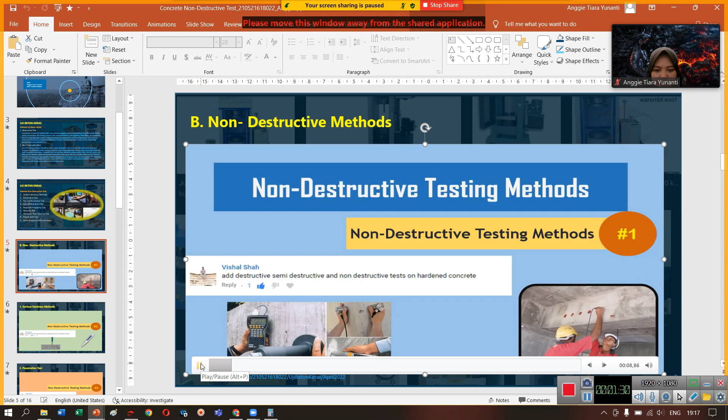Non-destructive testing, NDT, is defined as the method of inspecting, testing, or evaluating materials, components or assemblies without destroying the serviceability of the part or system.

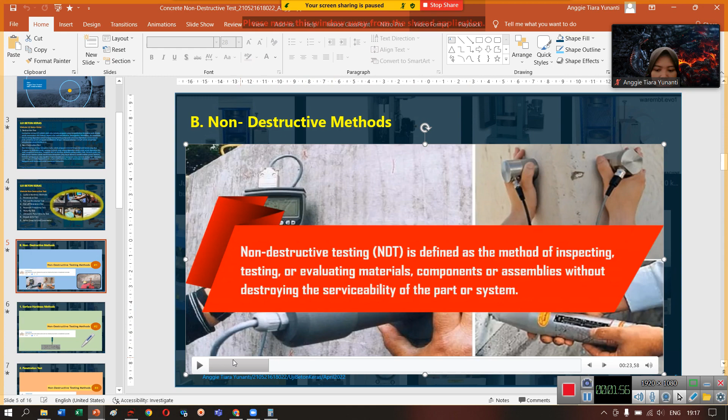Non-destructive testing is considered as a powerful method for evaluating existing concrete structures in terms of their strength and durability, and also helps in assessing and controlling of quality of hardened concrete.

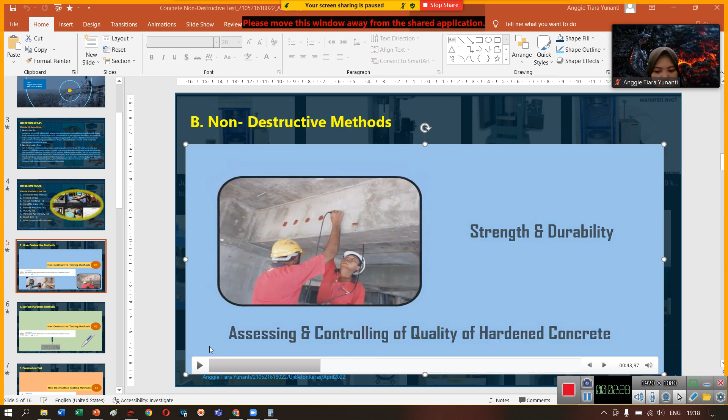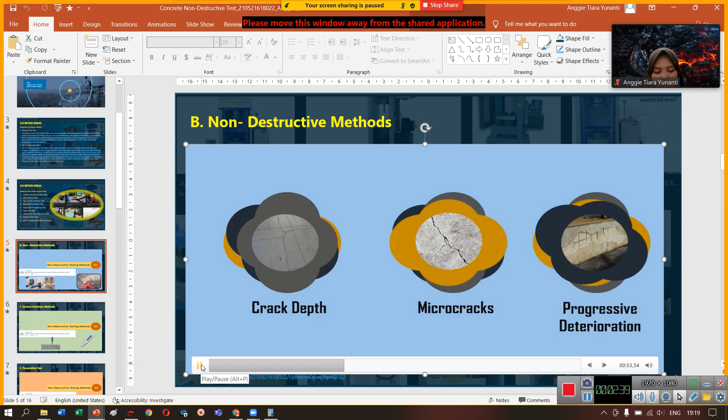Helps in investigating about the crack depth, micro cracks, and progressive deterioration. NDT methods do not affect the future usefulness of a structure.

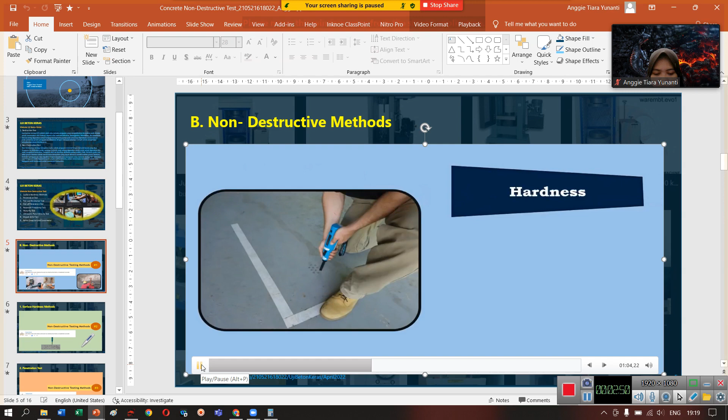These methods are used to measure properties of concrete such as hardness, resistance to penetration of projectiles, resonant frequency, and ability to allow ultrasonic pulse velocity to propagate through it. With the help of these data, the strength, durability, and other required properties of concrete are calculated.

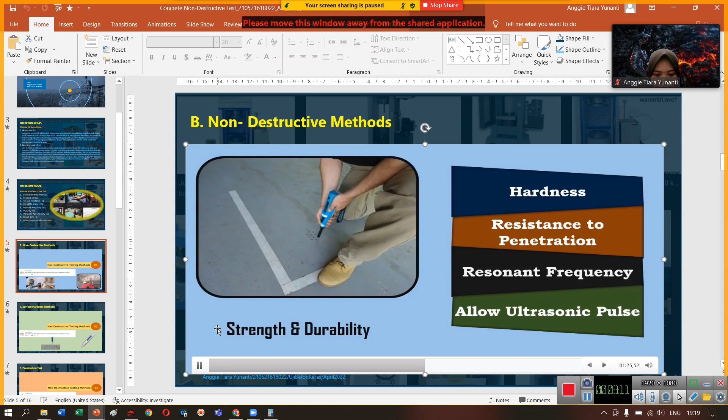There is a wide range of NDT methods which are used by the civil and structural engineering industry. The most common methods of non-destructive testing of concrete are:

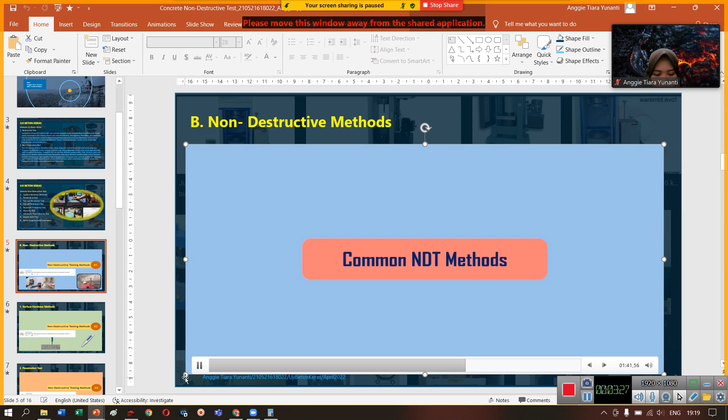Surface hardness methods, penetration resistance method, pull-out resistance methods, pull-off resistance method, resonant frequency test method, maturity test method, permeation test method, ultrasonic pulse velocity method.

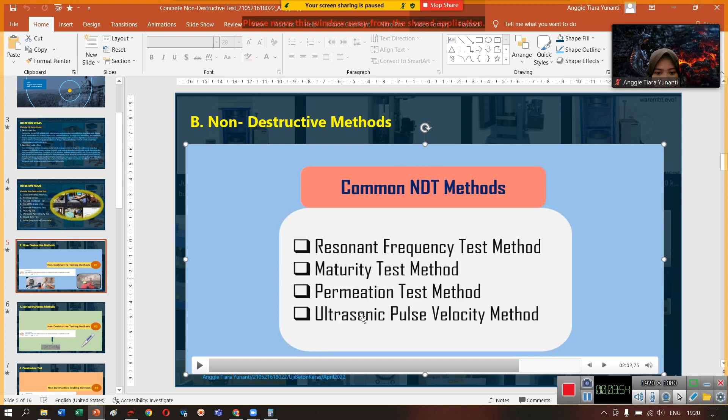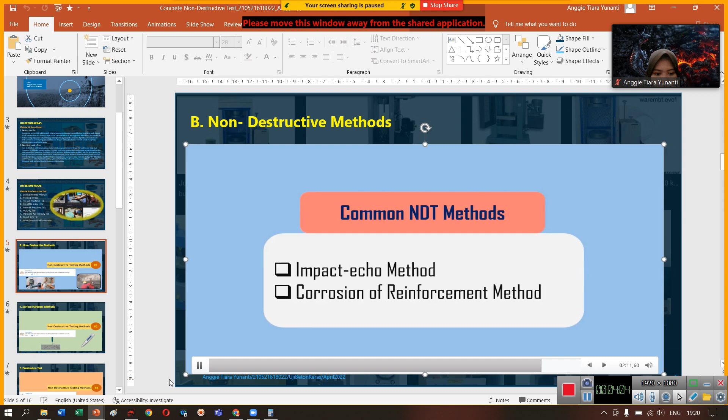Impact echo method, corrosion of reinforcement method. Let us discuss one by one in the future videos. Thank you for watching. Stay tuned.

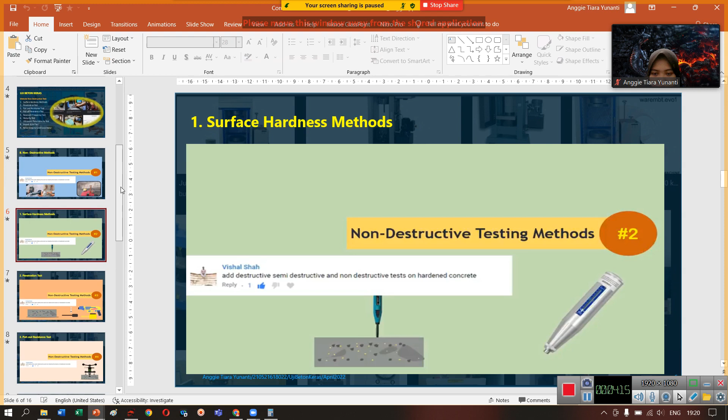Non-destructive surface hardness methods are non-invasive procedures that investigate strength characteristics of the concrete structure.

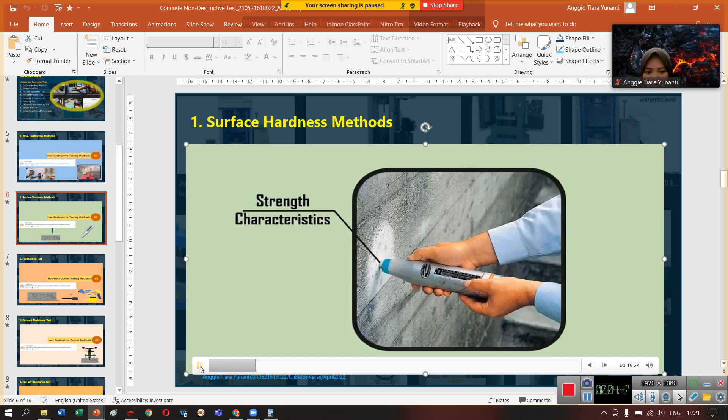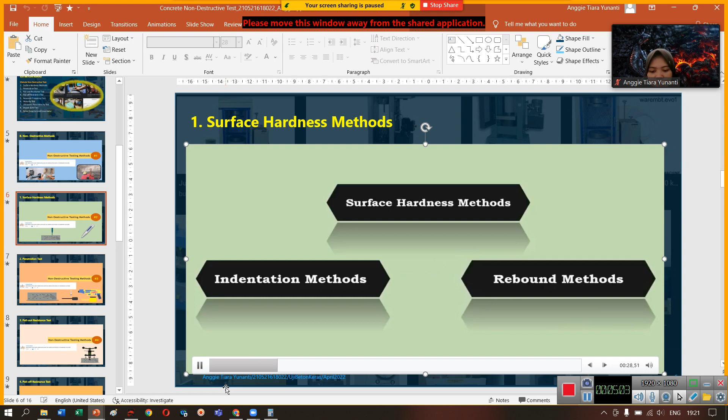This is generally done in any of two methods such as indentation methods and rebound methods. The rebound method is frequently applied to investigate concrete strength characteristics of concrete.

This test was developed in the year 1948 by Swiss engineer Ernst Schmidt, and thus it is commonly referred as the Schmidt rebound hammer.

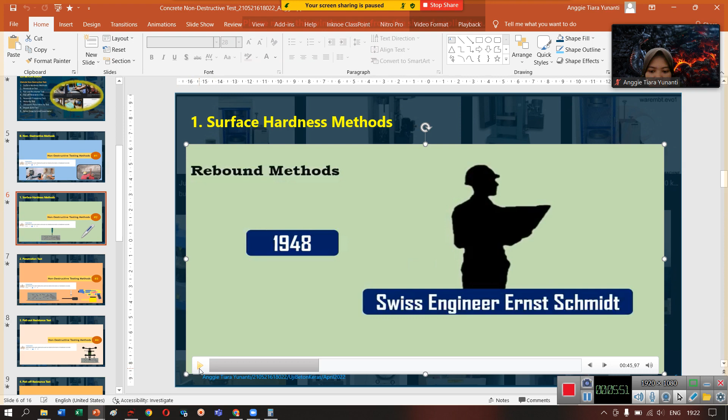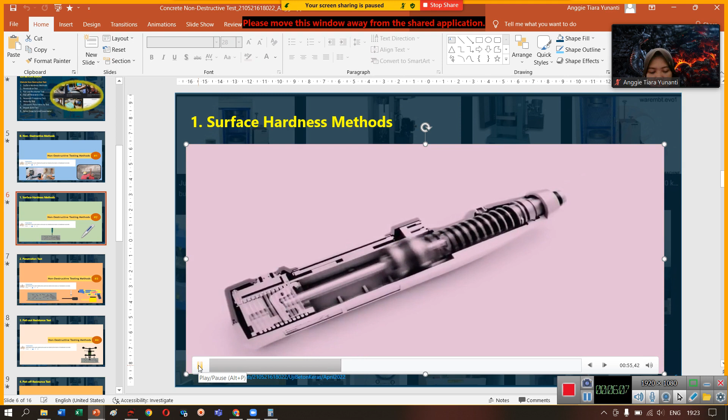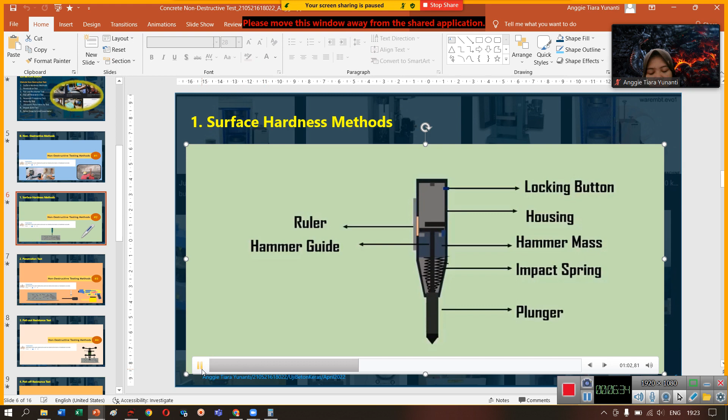When the plunger is pressed against the surface of the concrete, the mass rebound from the plunger. It retracts against the force of the spring.

The hammer impacts against the concrete and the spring control mass rebounds, taking the rider with it along the guide scale.

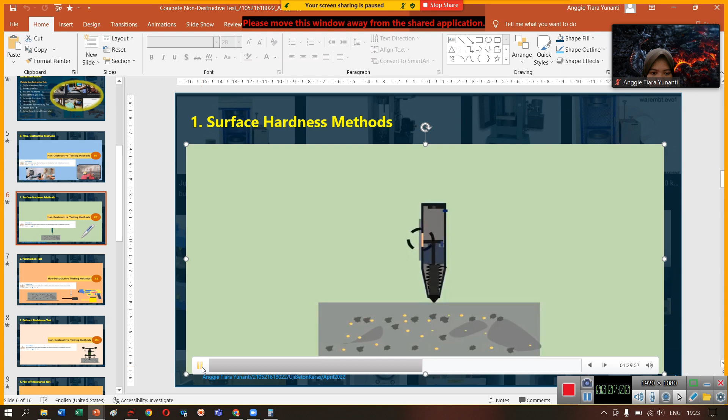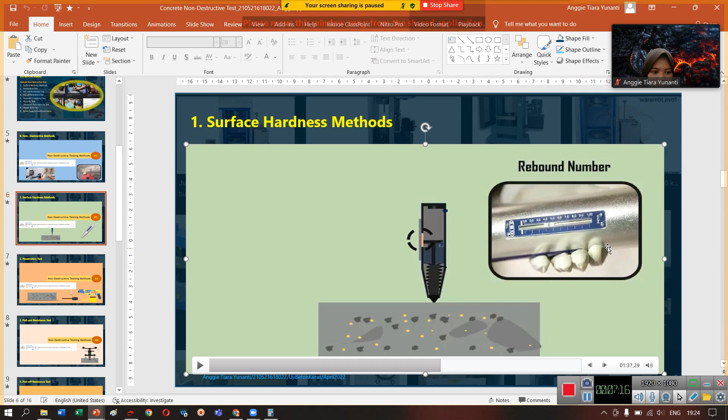The rider indicates the distance traveled by the mass, which is called the rebound number. The result can be seen on the device.

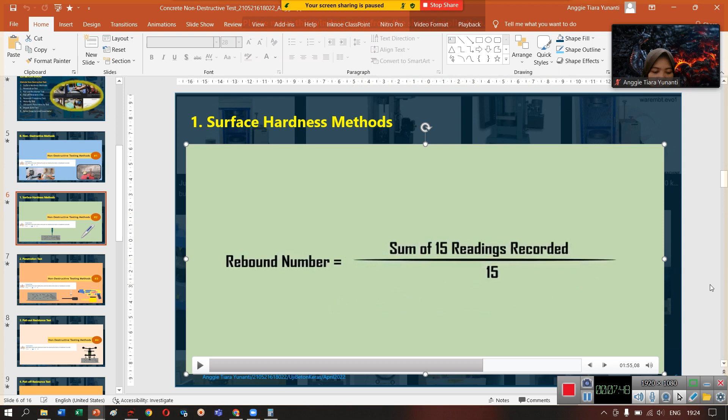The value of rebound number is taken an average of 15 readings. The rebound number value is obtained from the total of 15 readings, then divided by 15.

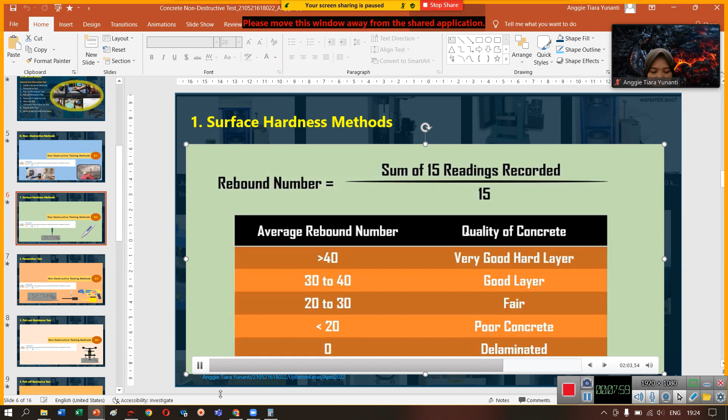There are many types of rebound hammer which vary considerably in performance, types, and needs calibration for use on different types of concrete.

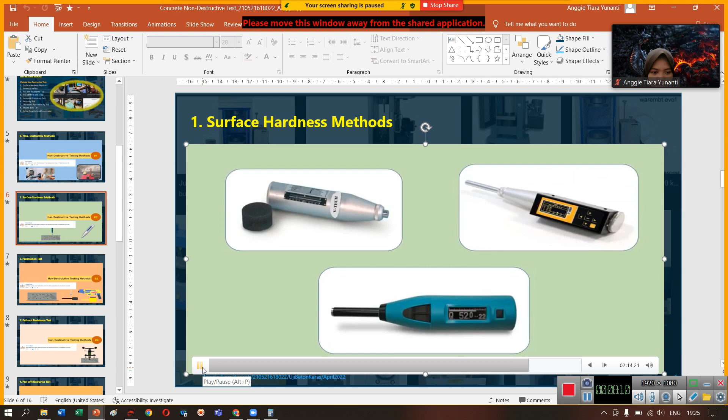This test can be conducted horizontally, vertically or at an inclined angle. Thank you for watching. Stay tuned.

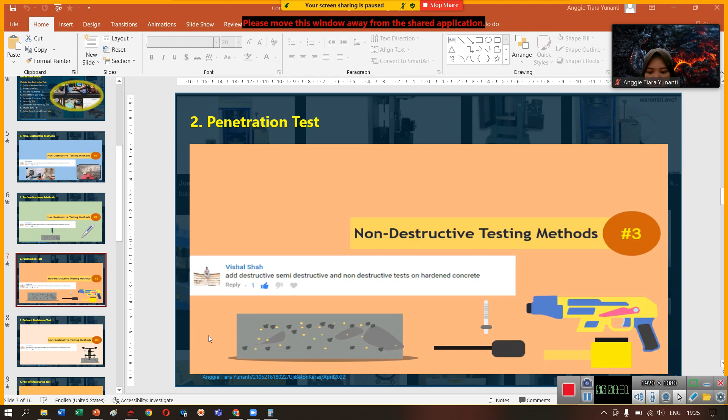Untuk yang selanjutnya adalah penjelasan mengenai penetration test. Penetration tests on concrete.

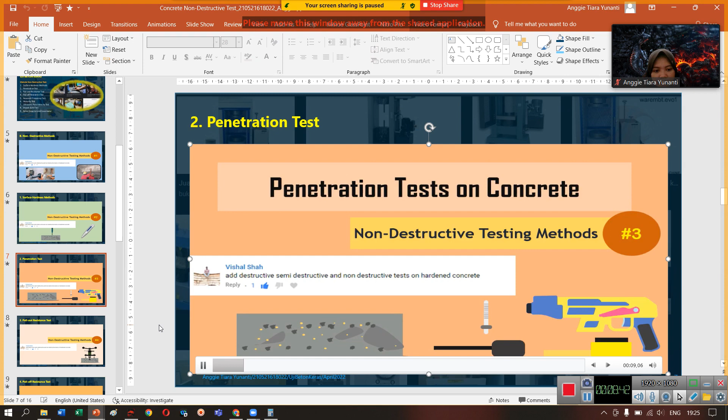Penetration resistance methods are aggressive NDT procedures that are used to determine the strength properties of concrete. Sama dengan tes surface hardness method, tes penetration test ini digunakan untuk mengetahui kekuatan dari beton.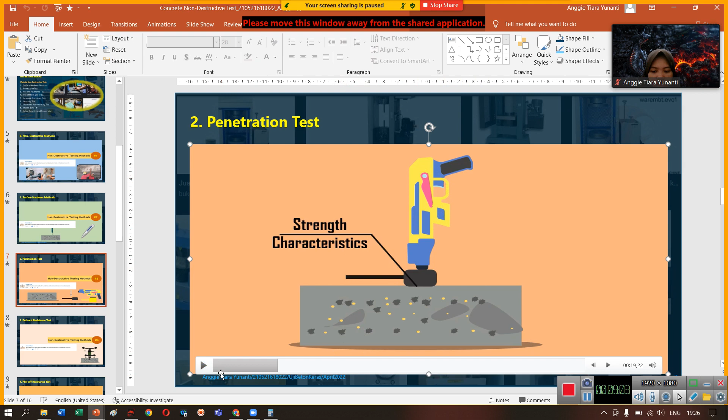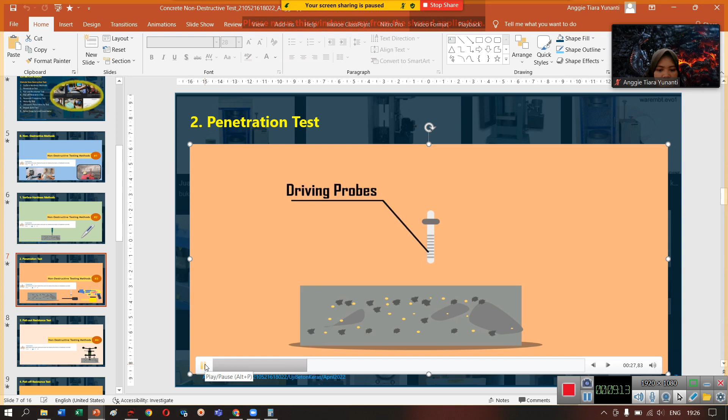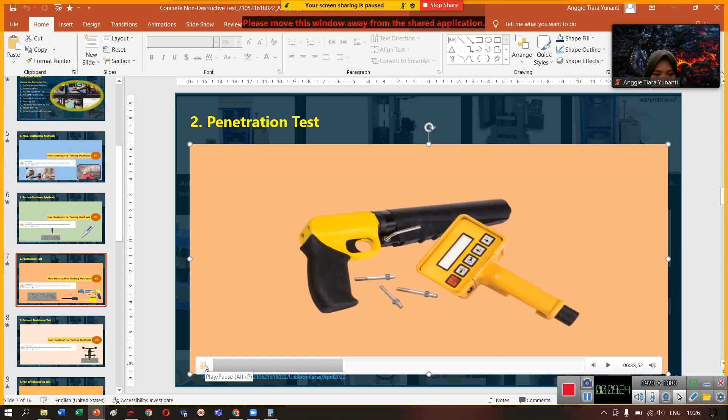This method is done by driving probes into concrete samples using a uniform force. The most commonly used penetration resistance method is the Windsor probe system. The system consists of a powder-actuated gun, which is used to drive hardened alloy steel probes into concrete structures and a measuring unit.

Jadi pengujian penetration test ini dilakukan dengan alat pada gambar, yaitu ada powder actuated gun, kemudian ada steel probes dan measuring unit. A probe of diameter 6.5 mm and length 8 cm is used for testing.

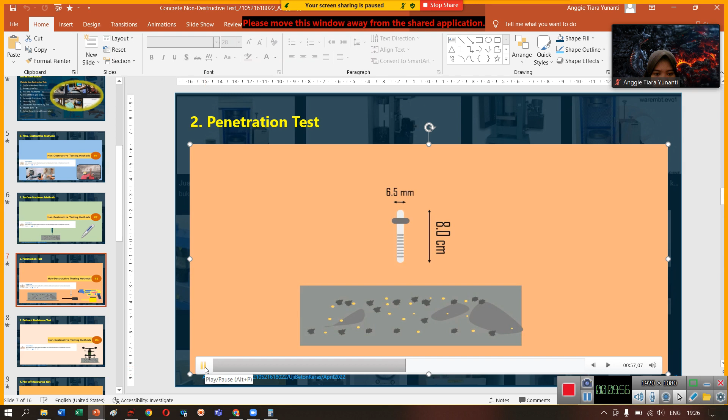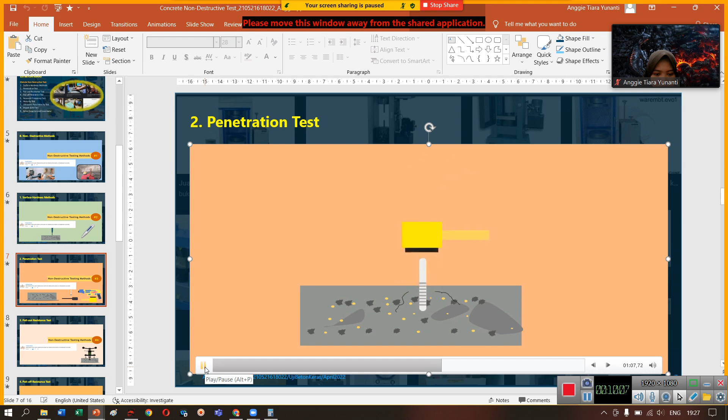The gun is placed on the required location and probe is forced onto the concrete sample. The depth of penetration of the probe provides the indication of the compressive strength of the concrete. The depth of penetration is generally correlated with the compressive strength of concrete.

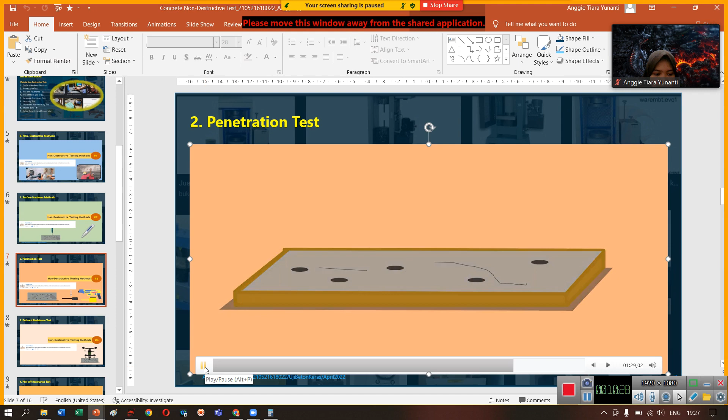The main disadvantage of this method is it makes a hole and damages the structure, and the accuracy of the result is quite low compared to other testing methods.

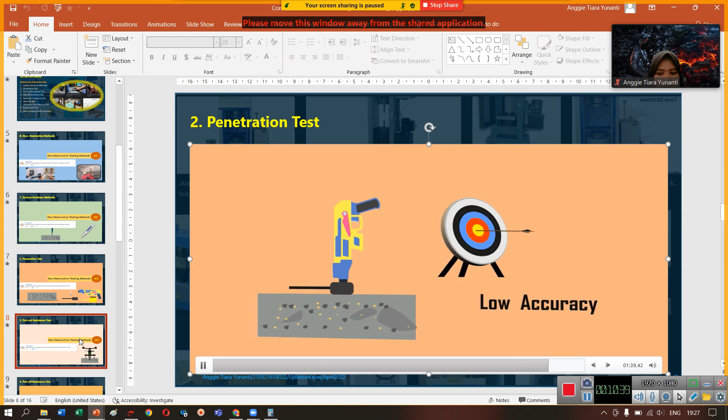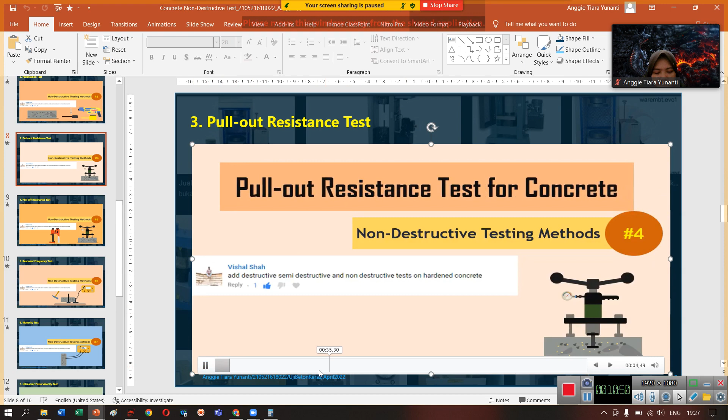Kemudian yang selanjutnya adalah pull-out resistance test. Pull-out resistance test for concrete. A pull-out test measures the force required to pull out the shaped rod whose enlarged end has been cast into that concrete from the concrete.

The stronger the concrete, the more is the force required to pull out. Using established correlations, the force provides the concrete strength properties.

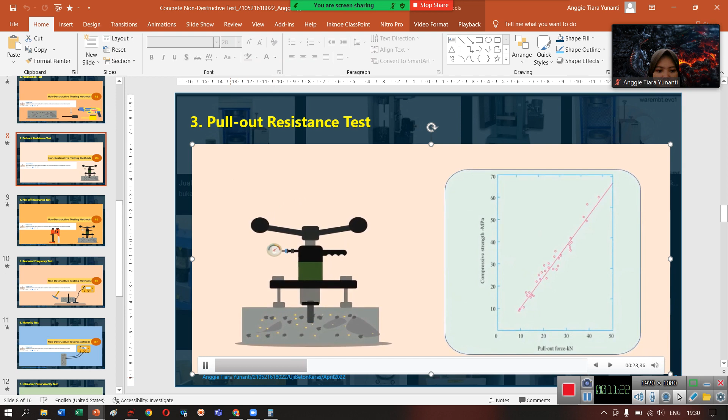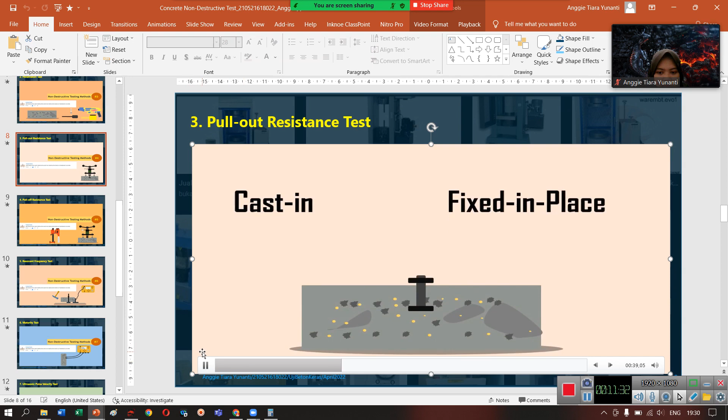The rod inserts are done by two methods, namely cast in and fixed in place. In the cast in method, the inserts are placed within the fresh concrete. In the fixed in place, the inserts are positioned into a drilled hole with hardened concrete.

The instrument setup to pull the insert is shown on the screen. The instrument is placed over the inserts and force is applied to pull the inserts. The pull-out force is resisted by normal stresses and shear stresses acting on the insert surface.

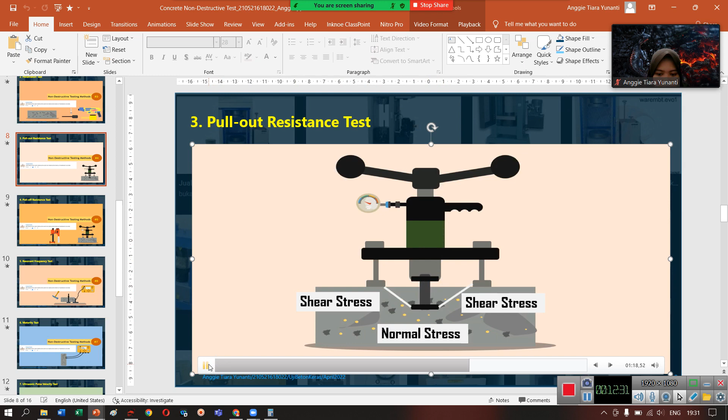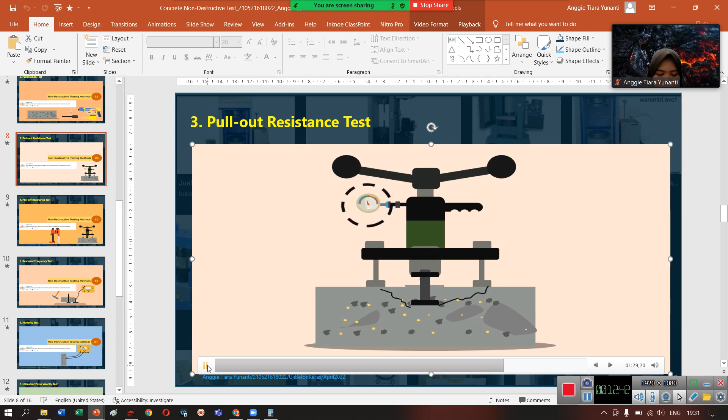The force is applied till the initial breakage in the surface is recorded. The force is noted on the gauge attached to the setup. Correlating the force with the graph shown on the screen, the compressive strength of concrete can be calculated.

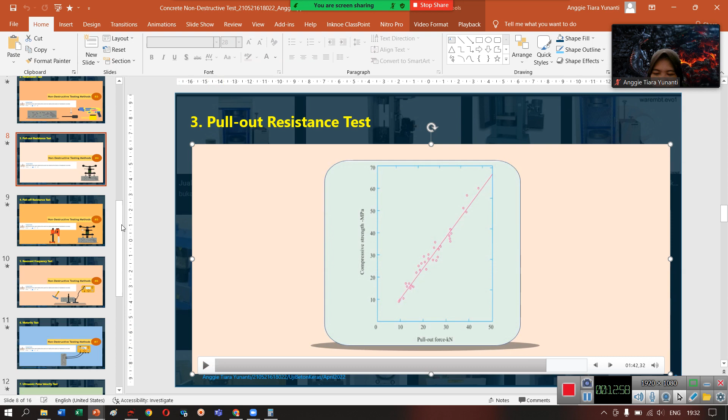Pull-off resistance method for concrete. The pull-off test is an in situ strength assessment test for concrete, which measures the tensile force required to pull a disc bonded to the concrete surface with an epoxy or polyester resin.

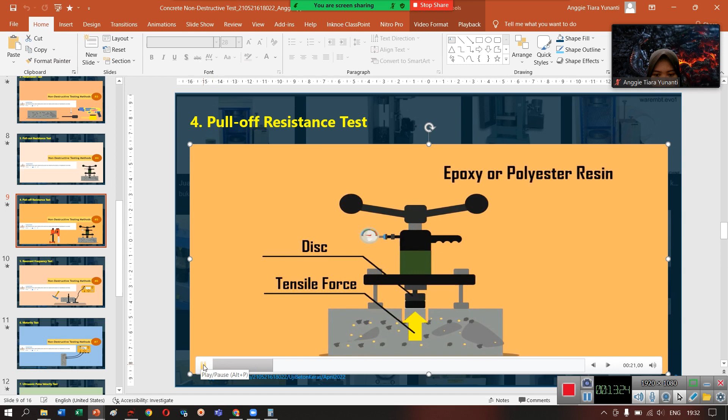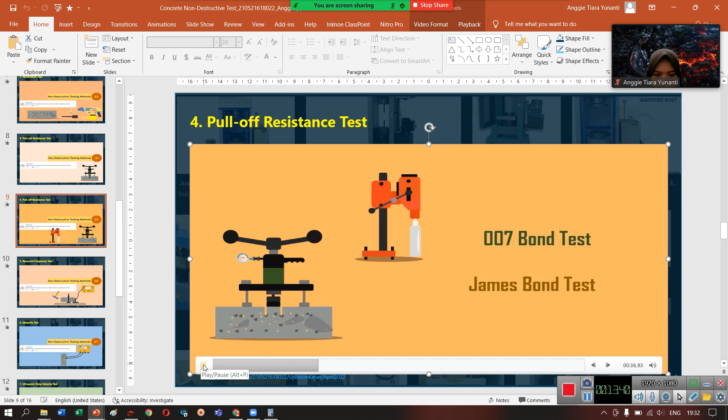The pull-off force provides an indication of the tensile and compressive strength of concrete. The most commonly used pull-off test is the 007 bond test or James Bond test. The test consists of a hand-operated lever, concrete core cutter, bond discs, an adjustable alignment plate, and force gauge.

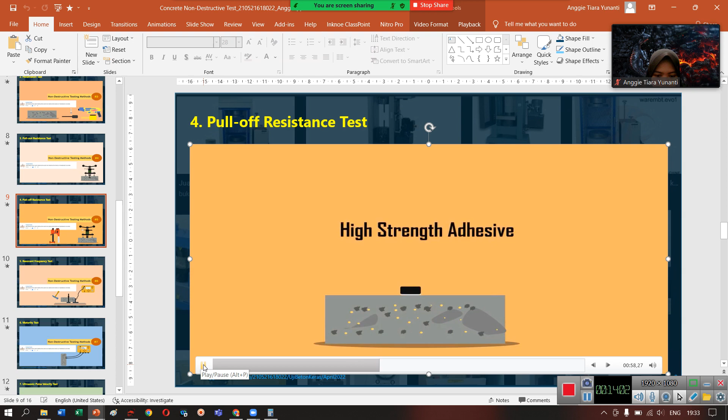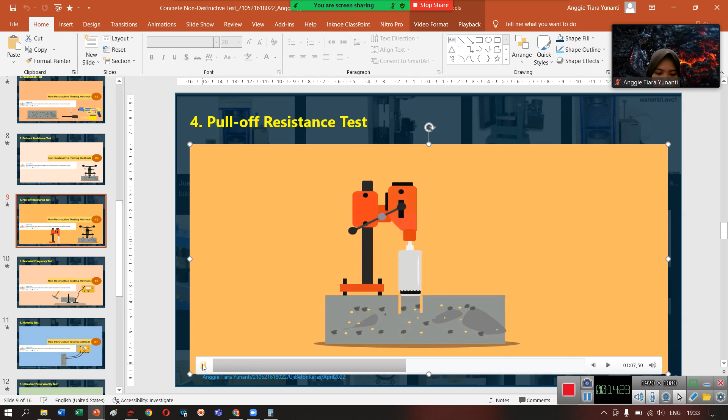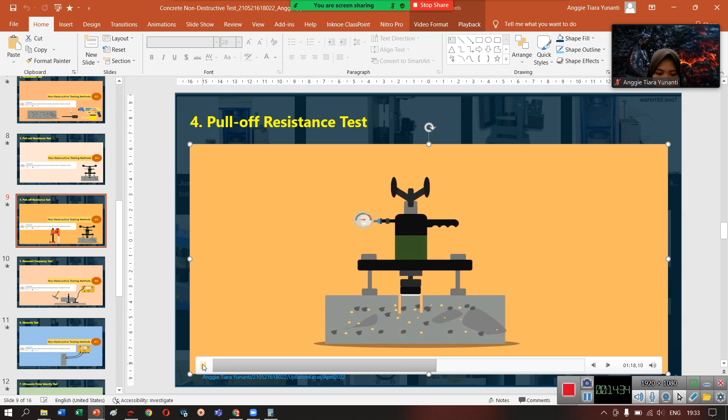Next, the disc is attached to the hand-operated lever by a screw. After leveling the adjustable alignment plate, the tension force is applied by the lever till the disc comes off with concrete. The force required to pull off the disc is measured in the force gauge.

The tensile strength of the concrete is calculated by dividing the tensile force at the failure by the area of the disc. Jadi hasil dari tensile strength of concrete-nya bisa diambil dari berapa hasil dari tensile force yang sudah diuji dibagi dengan area dari sampel yang diuji.

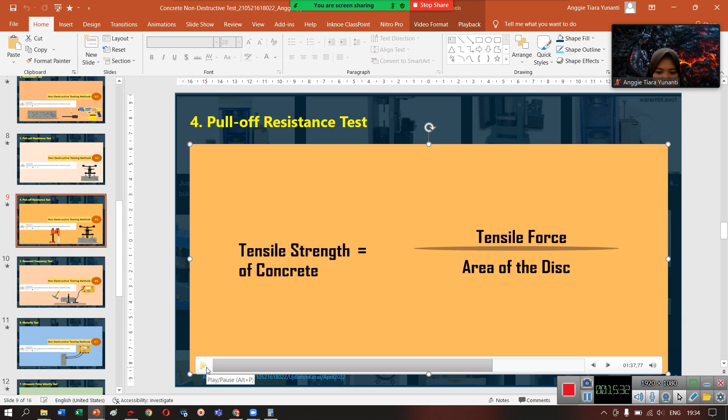With the help of relationship equation of tensile strength and compressive strength of concrete, the compressive strength is calculated.

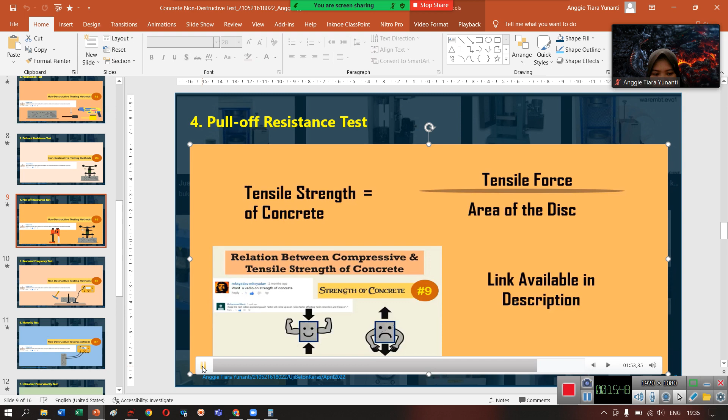Kemudian untuk yang selanjutnya adalah resonant frequency test.

Resonant frequency test for concrete. Resonant frequency methods are generally conducted to determine material properties by measuring their natural frequency of vibration.

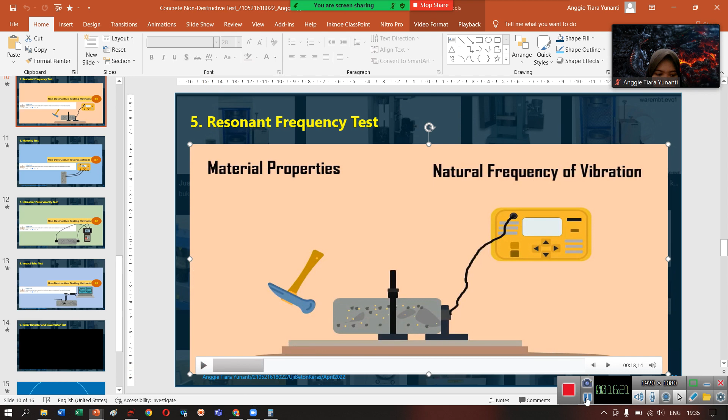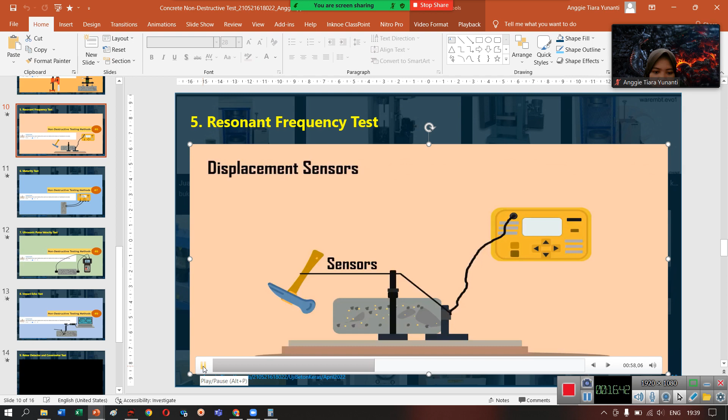The common types of sensors used are displacement sensors, velocity sensors, and accelerometers.

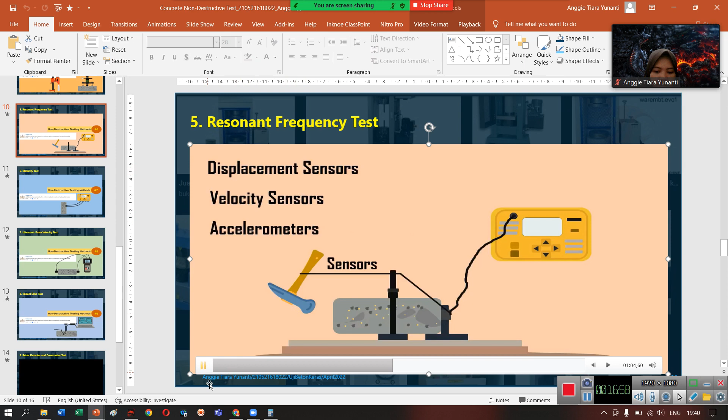The vibration is caused on the specimen at one end and received at the other end. The test is done by striking the specimen with a hammer, and the resulting vibration appears on the sensor display. The value of vibration is noted from the display attached to the setup.

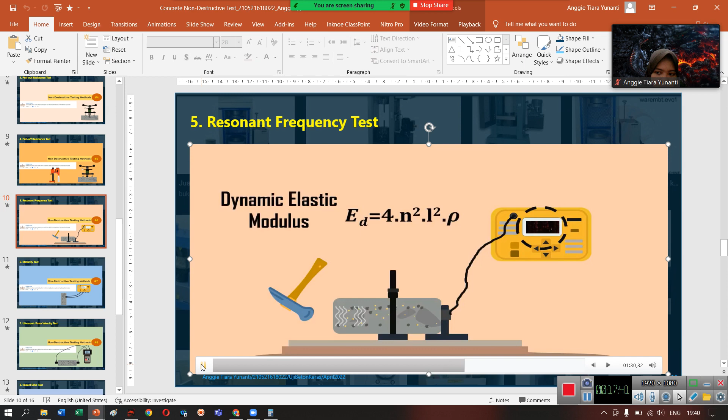Dynamic elastic modulus is calculated by the equation ED = 4 x n squared x L squared x rho, where n is frequency, L is length of the beam, and rho is the density of the beam.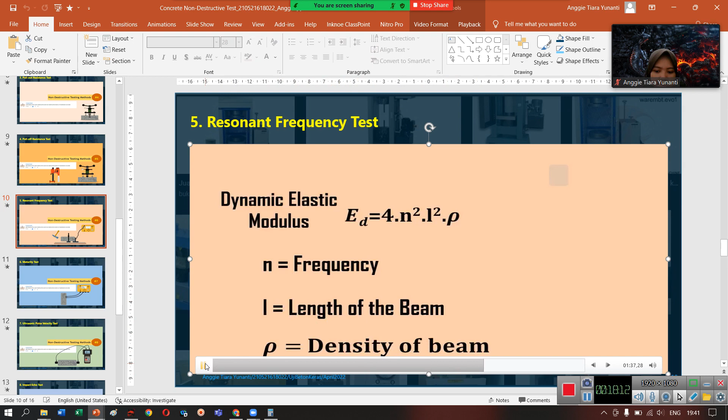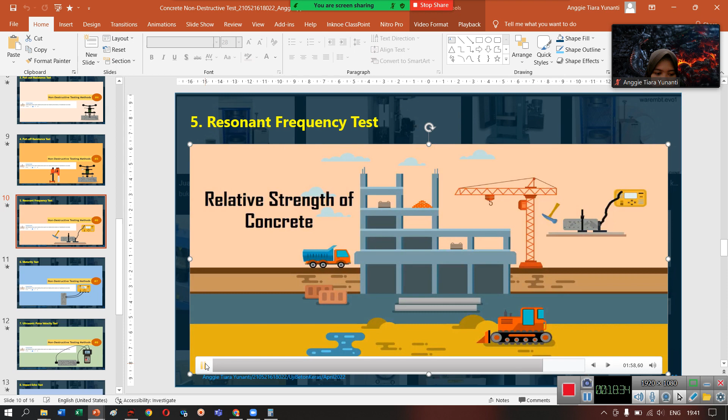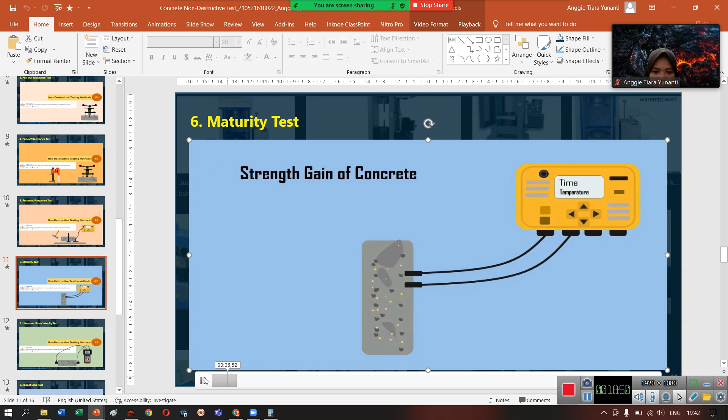Next is the maturity test. Maturity test on concrete. The maturity method of NDT technique for determining strength gain of concrete is based on the change in temperature of concrete over time.

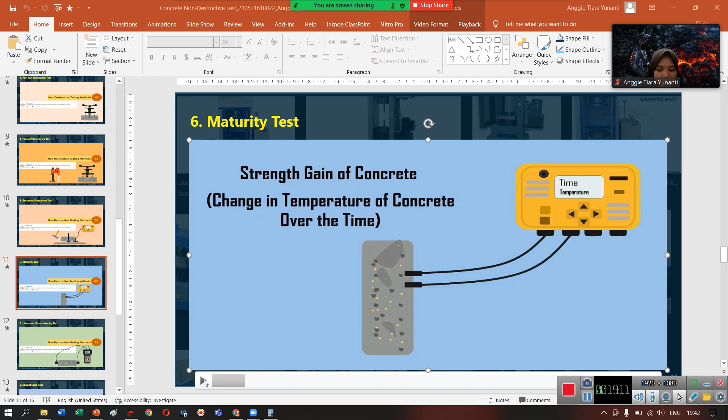The maturity test is a combination of laboratory and field test.

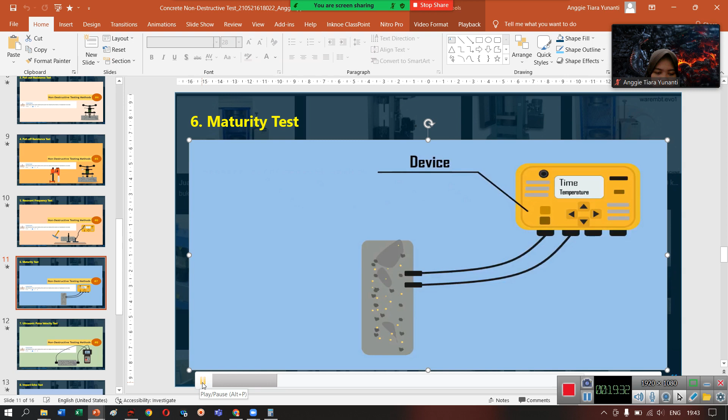The apparatus required for this test is a device to monitor and record the concrete temperature as a function of time, and a number of temperature sensors based on requirements.

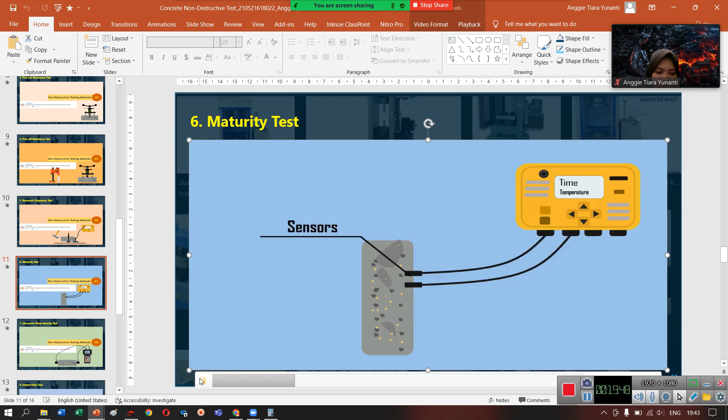At first, prepare 15 cylindrical concrete specimens of standard size.

The mixture proportions and constituents of the concrete should be like those of the concrete whose strength will be estimated using this method. Embed temperature sensors on any two specimens.

Connect the maturity device to the sensors. The device measures the temperature at equal intervals of time. Before testing, the sensor and device must be connected first.

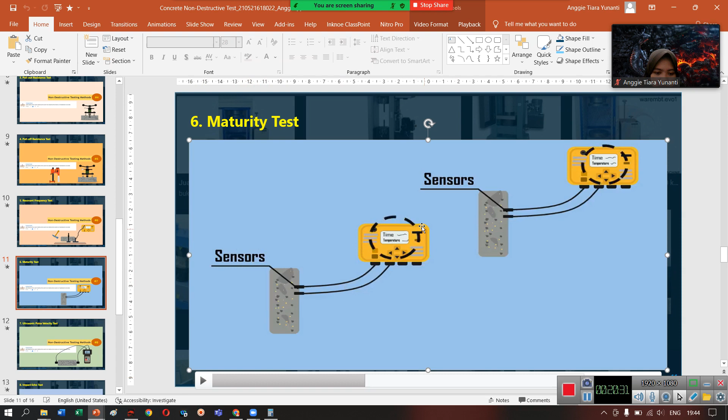Simultaneously, perform the compressive test at ages of 1, 3, 7, 14, and 28 days. Before testing, the cylindrical specimens must undergo concrete compressive testing at day 1, 3, 7, 14, and 28.

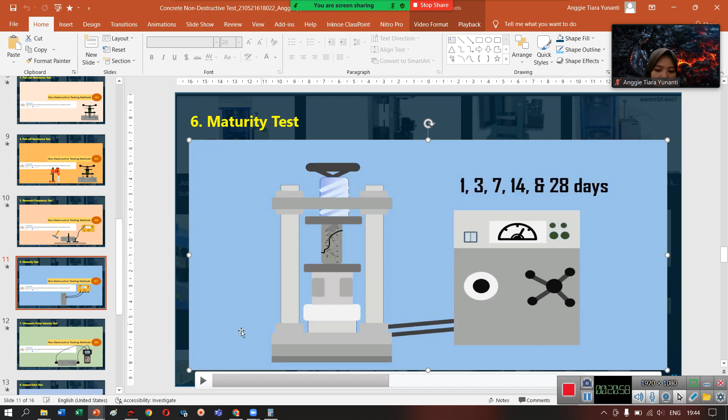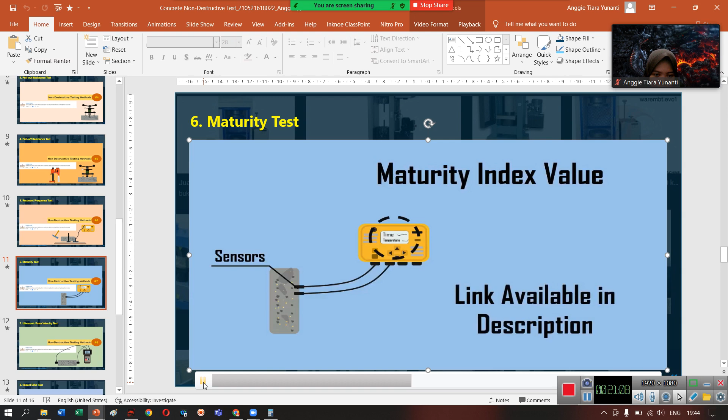With the help of the time and temperature recorded, the maturity index value is calculated. To know more about this, refer to the video link given in the description.

Now draw the graph considering maturity index on the x-axis and compressive strength on the y-axis. This graph is considered the standard graph for this concrete.

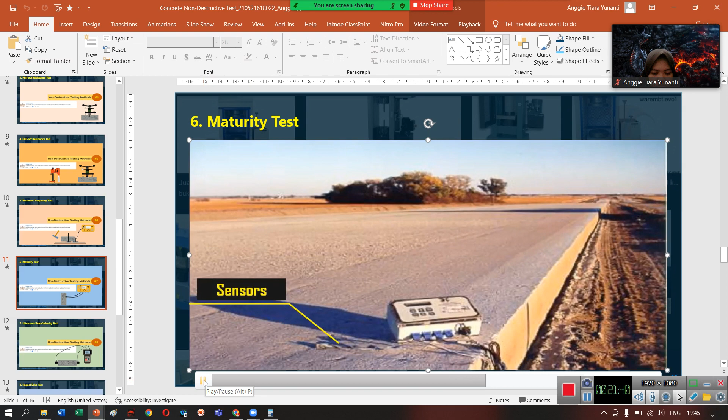Now the test is continued in the field. In the same way, the temperature sensors are embedded in the required portion at site, and the maturity device is connected. The device records the temperature of the concrete at regular time intervals.

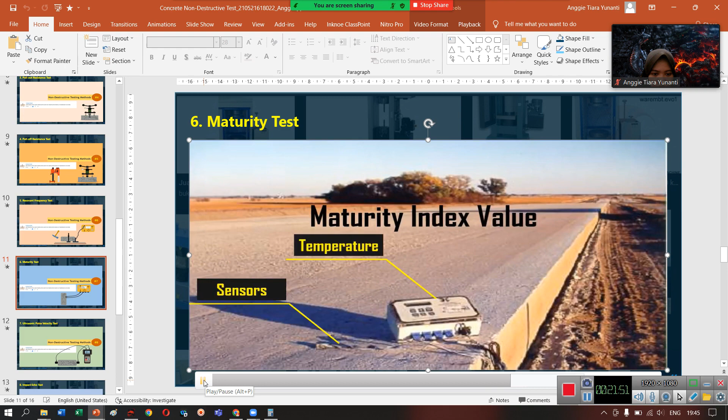The maturity index is calculated as seen earlier. Correlating the value of maturity index with the standard graph formed earlier, we can determine the current strength of concrete. This method is not commonly followed as it consumes more time than the other methods.